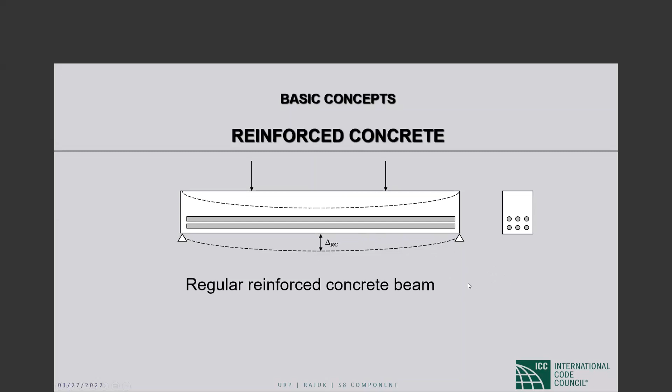That's a springboard for prestressed concrete. So what happens in prestressed concrete? Now we have an active steel that is not passive anymore. What we do is provide the steel in there. Please remember, this is not a regular steel rebar used in reinforced concrete.

It's a very high strength steel, and these are typically not a single rebar. There are multiple rebars, and most of the time there are strands made of several different components. We call that a tendon. So in any case, same beam, let's say simply supported, and we have the steel inside.

What we do now is stretch this steel. Sometimes we stretch it before the concrete is cast, which we call pretensioning—I have a slide later on that. And sometimes we call that post-tensioning, where the tendons are stretched after the concrete hardens.

So why is it beneficial? If you can imagine, if this stretched strand is let go and anchored against the concrete, immediately the tension converts to a compression, a pre-compression on the bottom of the beam. If that happens, then this beam suddenly cambers up—we call this a camber, which is really an upward deflection of the beam.

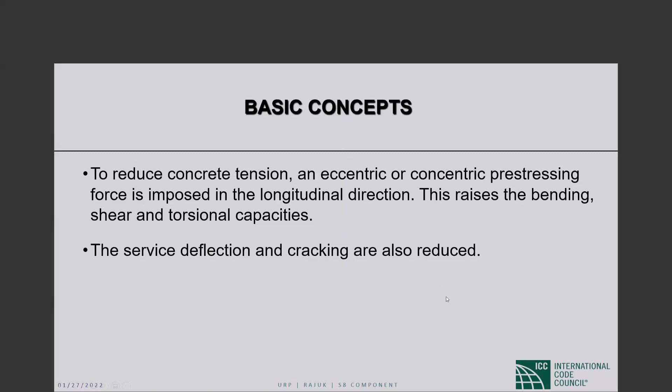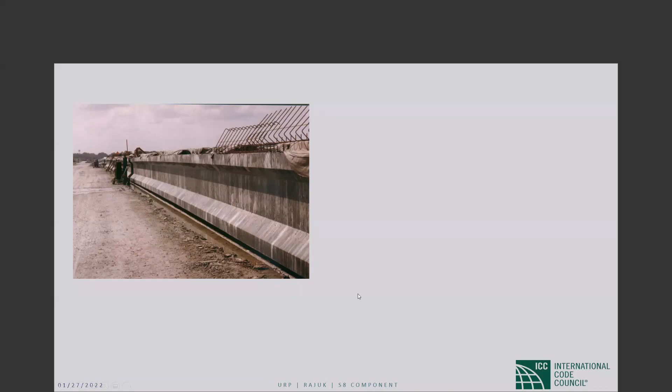What's the virtue of precasting? Well, there are many virtues. Precast concrete is supposed to be better quality. It's supposed to have more control. As you know, concrete has many, many ingredients. Modern concrete has even 10, 15 ingredients in there. So how to control that mix? That's the big thing. How to control the curing, how to control the storage. So that's really helpful in a controlled environment like a precasting yard.

So here is another beam, which you can see here. As opposed to the I-beam, this is what we call a ledge beam. Why is it called a ledge beam? Because you can see the ledges on two sides, right? So you can see the pre-stressing strands here very clearly. If you look closely, you'll see that these are not really one solid strand. It's made out of 7 wires. So typically, we call it 7-wire strand. There are many of them here in the bottom flange.

And this is used typically in a building where there are floor beams which come from the side and rest on this ledge beam here. Okay? Very simple construction. The floor beams are simply supported, while these can be simply supported or they can be continuous. So you see here, if I'm in a classroom, I would ask the students, what's going on through these pipes?

So these pipes are feeding steam onto the member. Typically once the steam is released, it's covered by fabric. So this whole concrete is steam cured.

What's the advantage of steam curing? We know the hydration of cement is very important in concrete. The more the cement hydrates, the better the strength. Typically moist curing is done about 28 days, but steam curing can cure the same amount of cement in about 24 or 48 hours. So this whole curing process will be done in 2 days.

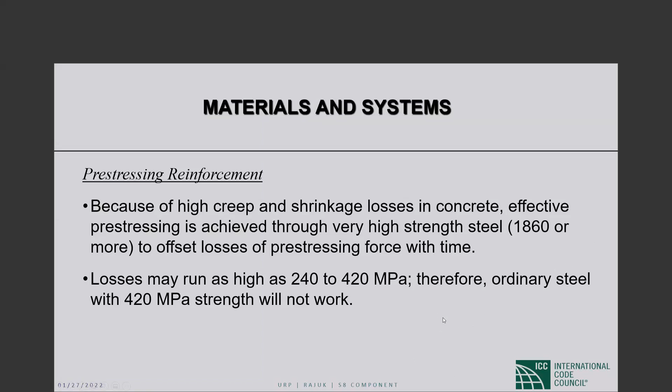So these are the different forms of pre-stressing reinforcement that are available. There are stress relieved wires, stress relieved strands, and high strength steel bars, Dywidag bars. Nowadays, the question is, do we have to use steel? No, not necessarily. As you know, composites are available now. There are reinforcing bars made of CFRP or GFRP, and there are also pre-stressing tendons available in composite.

So the advantage is that the composite will hopefully never corrode. They cannot corrode because they are non-steel. There are some thoughts that they may degenerate with time, the composite may degenerate, but that's a different issue. So the corrosion potential is wholly removed.

So one advantage of composite reinforcement is the life cycle cost. We talked about durability and sustainability of the structure in the previous slides, so we should not really look at the initial cost of the structure. If you think about the cost of steel rebar versus composite rebar, of course the steel will be much cheaper because it's widely used and widely produced. So with time, hopefully the composites will take hold and the price will go down.

Composites are quite a bit more expensive than steel right now. But if you look at the life cycle cost of the structure, it's a no-brainer, because in a structure in an aggressive environment, if you have to repeatedly intervene with rehabilitation, repair, inspections, or even replacement, that simply may not be cost effective in the long run. So you need to look at the cost benefit ratios, and from that angle, composites make sense.

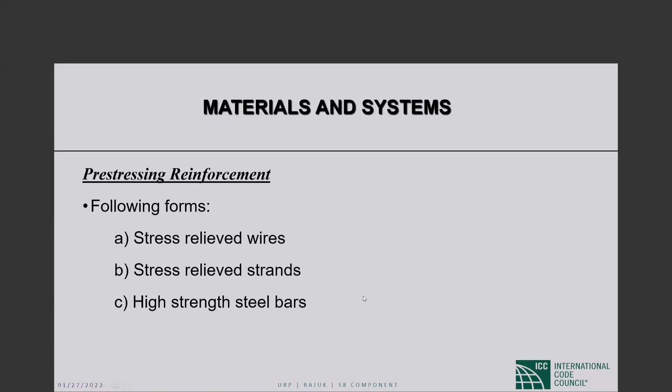So I talked about the two types of pre-stressing systems. One is pre-tensioning and one is post-tensioning. There are structures where they're hybrid - the structure can be partly pre-tensioned and partly post-tensioned. I will talk about that a little bit later on. Or the structure could be wholly pre-tensioned or wholly post-tensioned.

Sorry, somebody's calling on my Teams phone here in the office. I apologize for that.

So here are some points on pre-tensioning. In pre-tensioning, as I mentioned before, we have fixed anchorages - bulkheads on the sides. Before the concrete is cast, we place the tendons there, then we stretch it, and then we anchor it against the bulkhead. So you can imagine that the tendon is still in tension.

It is normally done at a precast yard, which is really cost effective in terms of the management of the casting and also the storage and transportation. Or for large jobs, it can be done on the site. It's not unusual in the USA for large bridge projects to have a temporary precast yard set up at the bridge site, which really cuts down on the amount of transportation that is done.

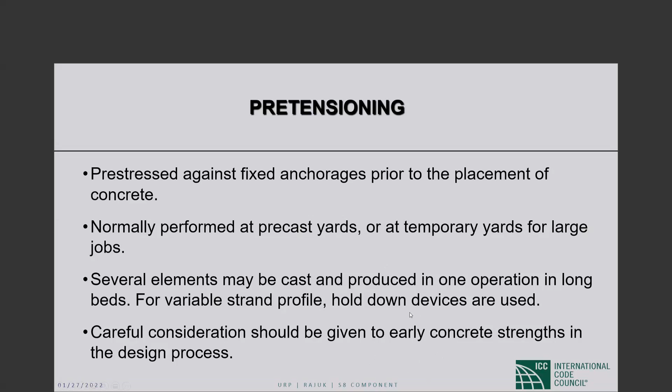And there's a calibration chart - if this is elongating by 500 millimeters or whatever, then what's the corresponding force in kilonewtons? That's known from the manufacturer. So that's what we do, it's a very simple process.

I have some photographs, I don't have them here in this lecture. I probably will include them in my bridge lectures later on, where you can see how people are measuring this. Now, this is very, very risky practice - I should not laugh, because people have been known to lose their fingers because someone standing operating this jack, and suddenly this strand breaks, and strands can be defective.

There may be some defect in the manufacturer, so suddenly this flies at high speed, and there are injuries to people standing here. That's a very difficult, very risky practice, staying nearby this. I'm sure the precasters take proper precautions, and there are liability issues that are addressed.

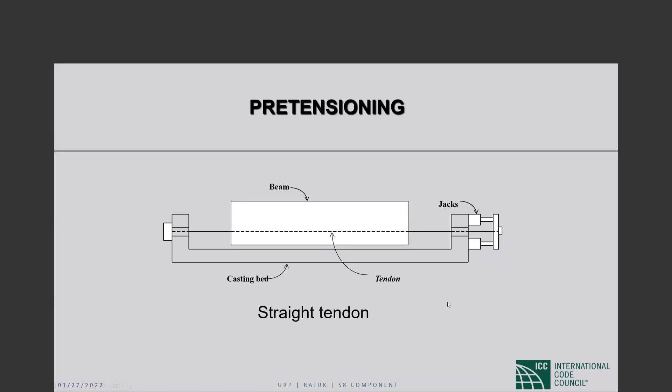Long line casting follows the same logic: beam 1, beam 2, beam 3, and so on, even beam 10 for a big yard - there can be 10 beams. They are laid longitudinally, a very efficient system. The same tendon goes through all of them. There's a little bit of separation here for cutting the tendons, but it goes in here.

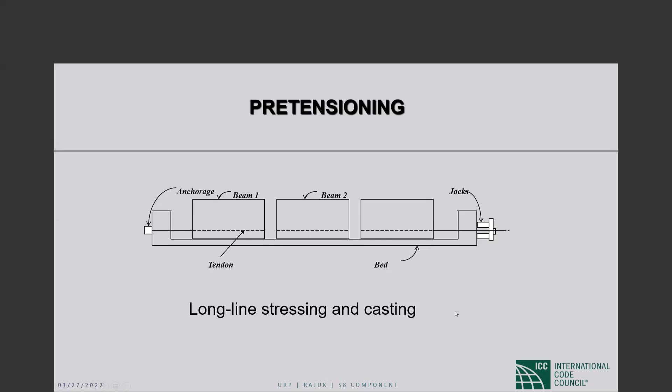As opposed to pretensioning, post-tensioning is done on hardened concrete. So instead of having the strand bonded to the concrete, what we do is place things differently. Let me adjust this so it doesn't obscure the view.

Strands are placed in ducts. What we do is place empty ducts, like a conduit. It can be made of steel or plastic. These are placed in the formwork ahead of time, before the concrete is poured.

After that, we apply the concrete, casting it around the duct. You can imagine there's an empty duct, a void, in the concrete, and we can even vary the profile of the duct to conform to the moment diagram. Once we apply the concrete, it hardens.

Then we feed the strands through the duct, from one end to the other. We anchor it on one side and apply the pre-stressing from the other side. There are grouting ports into the ducts, and we typically inject grout from one side of the duct. The grout comes out the other side, so we know the conduits are fully grouted, giving us the bonding we desire.

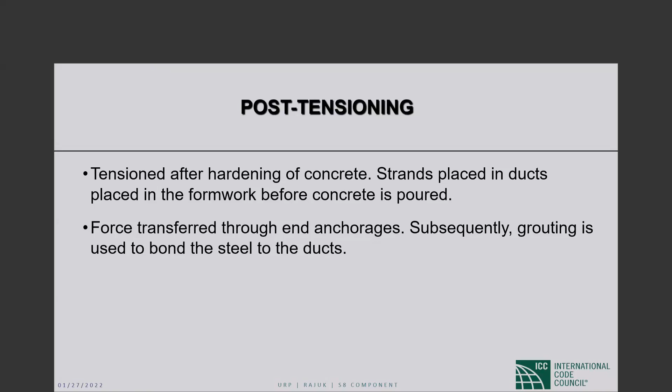Sometimes there are intermediate diaphragms for the beam. If there are voids in the beam like this, the tendon can still be fed through the different parts of the beam, and we can stretch the jack, the tendon, the same way. We'll have the desired post-tensioning in the beam, which stabilizes it. If you need to reduce the dead load of the structure, this is a convenient way of doing that.

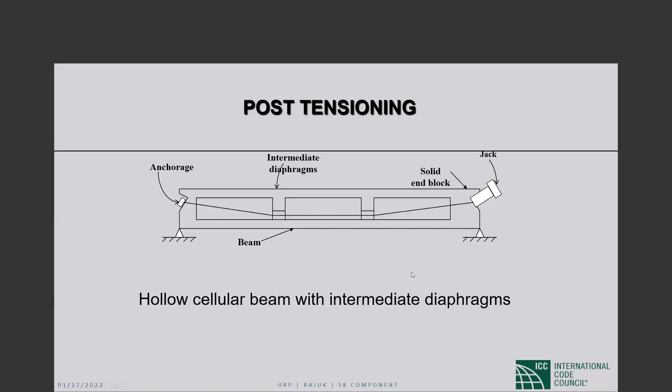Here's a case of a continuous beam, one reason why we do post-tensioning. This is a cast-in-place beam, two spans, three supports. As we can imagine, this is a continuous beam. Depending on the end condition, there could be end moment. For this hinge support, there'll be no end moment, but we can guarantee there'll be negative moment at this intermediate support. This can be a bridge member or a building member with continuous spans.

It can be multiple spans, more than two. So there's no moment here at the hinge condition, but there is negative moment right there. And as we know, in the midspan area, there will be positive moment on this span and positive moment on this span. The trick here is the designer has to address those moment curvatures, or the moment profile, because we try to use the post-tensioning to effectively give us resistance against those moments.

So what we do is use a variable profile. You can see here that the steel is bent down here, below the centroid of the beam. This gives us a negative moment at this point from the pre-stressing, which will react against the positive moment from the loads, dead load and live load on the slab.

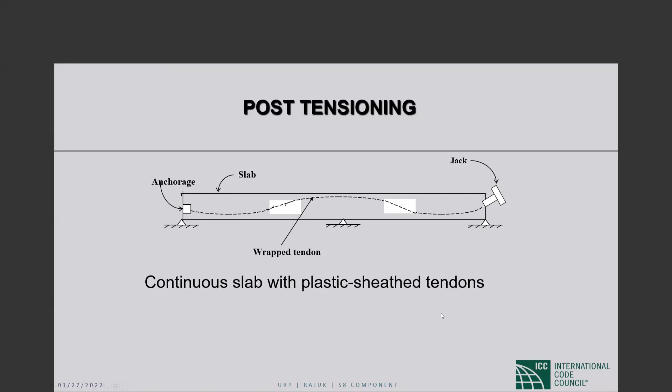So with that introduction on prestress construction, let's go into the design equations. Some of these are simple and some a little bit complicated. If I've taken them from ACI 318-08, the SI version, the number will be shown in parenthesis next to the equations. If you have a copy of the 318-08, you can go back and check them out.

As I mentioned in the previous slides, the stress in a prestressed member is very important, especially on the tension side. Not only that, the compression side is also important. Although concrete has reasonably high compressive strength, you don't want that to be exceeded. So these are the basic equations, which are not from the ACI code, but from mechanics or statics, maybe mechanics of materials.

Let me explain these three terms. This is the axial stress term, P over A, the prestressing force divided by the area of concrete. I have used negative sign as compression—some people may use positive for compression, but I typically use negative. So we understand that's uniform stress on the cross section.

Next would be the moment from the prestressing. The prestressing force times the eccentricity gives us the moment. Then the centroidal distance to that point, divided by I, gives you the bending stress. In mechanics of materials, we call that MC over I, a very well-known equation.

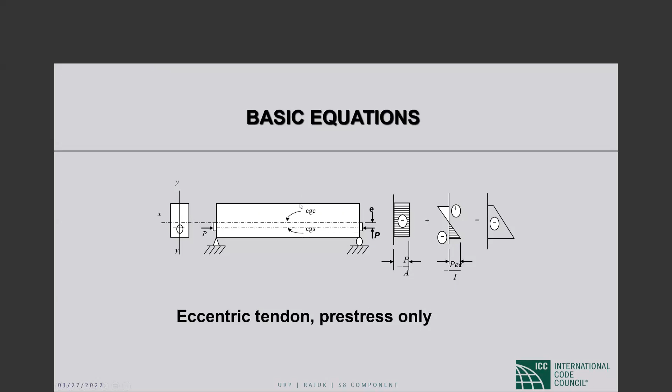So this is the condition which happens after prestressing transfer to the concrete beam. Now let's think about the life of the structure. I always believe in looking at the sequence of loading on the structure. It's very important. Sometimes as a designer, we forget that the loads are not applied at the same time. There can be lag in the loads applied.

So let's think of the life of this pre-stressed beam. It has been cast, and it may be lying somewhere in a precast yard on the side. It's not unusual to sometimes have them stacked up one on top of the other, because in the yard they're trying to save space. If it's at the site, it's probably being placed in service. So from the precast yard, we'll be moving them to the job site, at the building or a bridge, or at the temporary site, we'll be putting them up.

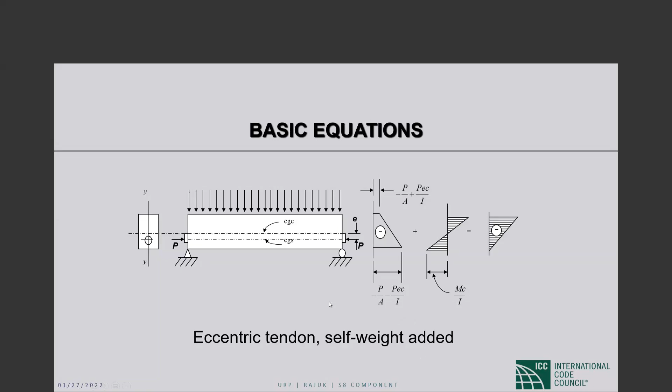With that, the next loading stage would be the self-weight of any additional attachments like slabs or decks or floor finish or something like that. And then we're going to go into the live load. All these sequences may not happen immediately after the previous stage. It will not happen the next day. It may take sometimes a few months for going from here to the next stage.

ACI addresses that, as you know, through providing covers, minimum covers for concrete, and then also providing clear spacing between rebars or layers of rebars. Now, we should not use the same values for pre-stressing. They're quite different, and I like to point out that in ACI there are separate values for pre-stressed concrete, which is different, most likely lower than reinforced concrete. I showed you that same photograph before.

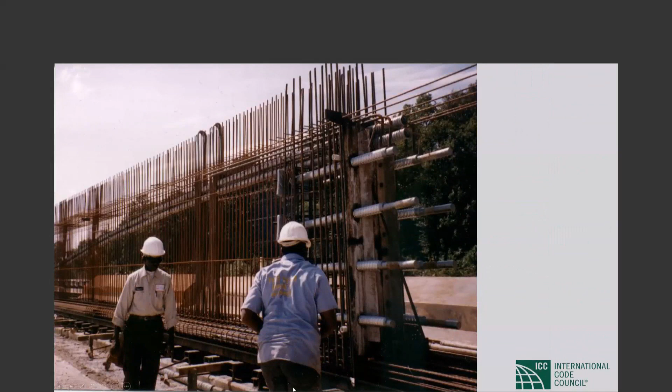Here is the post-tensioning beam. Interesting, post-tension beam. This is being cast here, and you can see clearly that the ducts are here. These are metal ducts. There are ducts in the bottom here, ducts here, ducts there, and ducts there. You can easily see the profile of the tendon going up from here, which was in the bottom, which I showed you in the drawing before, and it's following the moment curvature of the beam.

So over here, I'm imagining this will be a support where there will be negative moment. So this is trying to address that by varying the profile of the tendon and providing a negative eccentricity from the centroid of the beam. And you can easily see the shear reinforcement, which goes all the way up there. Most of the time, they are sticking up from the beam because we need the dowel action that would be needed to make the deck or the slab composite with the beam, if it's needed that way.

Also, I'd like to point out, these are what you may know as hold-downs, these are called lifting devices. These are made of cables which are embedded in the concrete. And if we need to lift that, we'll be lifting it from here upward. That's a tricky issue, and again, the designer should be aware of where should we lift it. It's a very, very critical point.

If it's a simply supported beam, you want to lift it a certain way, and that may cause unanticipated stresses, although it may be short or transient, because you're lifting it and placing it on the side or on a truck or barge or whatever. But if I'm not careful about anticipating those stresses and providing mild reinforcement at least to control cracking, that member may be in trouble. So that's good to remember.

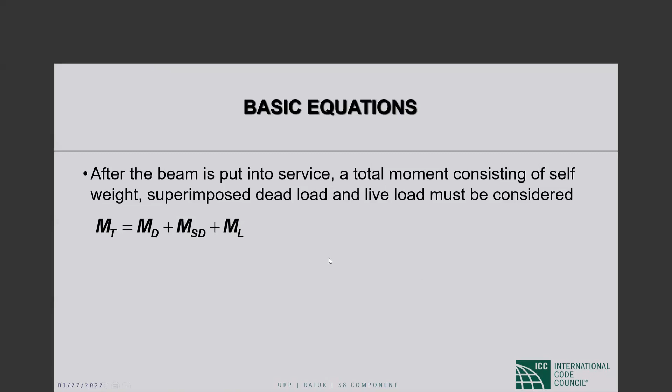So I like to point out here that the difference from the previous Pi I mentioned, which is the initial pre-stress applied at the beginning of the structure's life, has now been reduced. Typically in pre-stress design we call it effective pre-stress—it has been reduced by losses. Losses are unavoidable in pre-stressing steel, it will happen, and I'll cover that in some of the slides later on in this lecture. How much to reduce? Sometimes we use detailed calculations, and sometimes we use what we call lump sum losses for pre-stress. So this has summarized everything.

This is the top stress in the beam, and this is the bottom stress in the beam. I have placed this in a convenient form—instead of using that MC/I form, I have used the R squared form. R stands for radius of gyration, which is a convenient expression that summarizes the I and A values in the beam. So this has kind of simplified the equation.

And we can use these equations as well if you want to design for stresses in pre-stressed beams. This is the total moment. Now, what I have also done is replace I over C with S, which is the section modulus—this is the top section modulus, and that's the bottom section modulus. So you can appreciate, suddenly this equation looks a little bit simpler. Instead of using the longhand I and A values, I'm using R, radius of gyration, and section modulus.

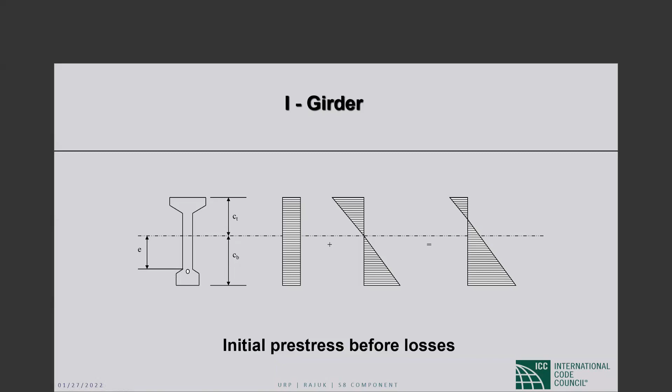Addition of self-weight. Now we understand that we are progressing now to the different loading stages. This was the previous with only pre-stressing applied. Now it's self-weight. And suddenly we have this situation where we have unequal stresses, quite a bit of non-uniformity on the cross-section.

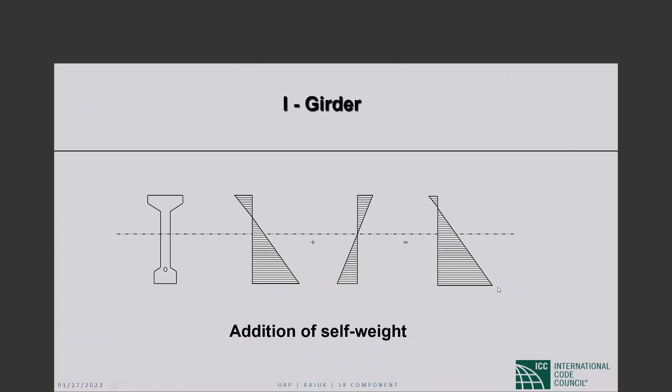Now this is service load at effective pre-stress. So the pre-stress has been reduced by the losses. And then we apply the other loads on the structure. Suddenly we have a little bit of improvement in the condition. So this stress has been reduced a little bit, and this stress has also changed. So that's why ACI applies stress limits. There are two kinds of stress limit. One is for the initial condition, and one is for the service condition. They are different, and ACI indirectly recognizes these kind of situations in those stress limits.

So now we can fall back onto ACI code 18.4. If you have a copy of that, you can look into the ACI code, or you can look online. I found ACI 318-08 metric online, okay, and it's available. Initially, I was trying to buy it from ACI, and it was quite a bit expensive, so I got it kind of free. Google is very much our friend, right? So you can get all kinds of stuff on Google.

So here is the stress f'ci, as I mentioned before, compressive strength at initial pre-stress. Now we understand. Please be familiar with this nomenclature, this subscript. i means initial, and f'c is the compressive strength at service. It makes sense, right?

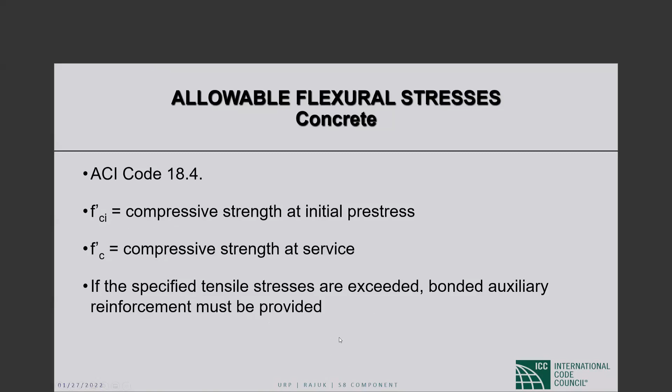So these are the stress limits. By now I'm hopeful you understand the difference between transfer and service load. To repeat: transfer means initially when the pre-stress is transferred, and service means when all loads are applied and the member is in service. ACI does not recognize intermediate load cases, as I mentioned before.

In compression, the limit is 0.6 F prime CI anywhere. So if you have a compressive stress, this is the limit. F prime CI is the initial concrete strength. We collect cylinders during casting, doesn't matter what stage. Then we test some of the cylinders initially, depending on when the pre-stress is released. If it's steam curing, we've been doing it at 2 or 3 days. Then we test the rest of the cylinders at service, typically 28 days.

At the end of simply supported members, the limit is 0.7 F prime CI. These are in metric, in megapascals. Using the US system, that would be in KSI with different factors applied. For tension stresses, the limit is 0.5 square root of F prime CI at simply supported members, or 0.25 square root of F prime CI at other locations. I'm interpreting this as meaning this could be for continuous members where tension can appear at other locations besides the end of simply supported beams.

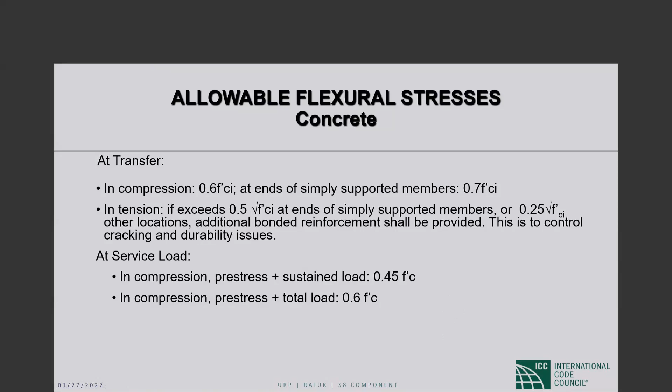So what I mentioned to you before was the stress in the concrete. ACI also imposes stress limits on the steel itself because you don't want the steel to be overstretched. Am I right? There are limits on the steel stresses.

So here are the limits, expressed in terms of these two factors you may be aware of. The steel has a yield strength. In reinforced concrete, we call it Fy. Or if I'm using bonded steel, we call it the same thing, Fy, but ACI adopts this subscript P for pre-stressing. So yield point is a critical factor in reinforced concrete design.

Although there is strain hardening in the steel, we typically ignore that. The pre-stressing steel is much stronger, so it will be a little more brittle, so the strain hardening and the yield point may not be that well defined. But in any case, we know that from the manufacturer. And FPU is the ultimate strength of the steel. So knowing these values, these are the limits.

This is from ACI code, section 18.5.1. So due to pre-stressing steel jacking force, which is at the very beginning when you are jacking, this is the limit, 0.94 FPY, but not greater than the lesser of 0.8 Fpu, and so on, for immediately after pre-stress transfer.

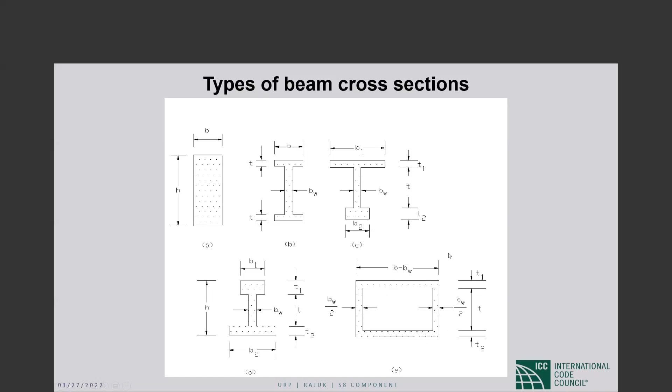Now, when you start designing pre-stressed concrete, sometimes you grope in the dark. What shape should I use? Should I use an I-beam, a T-beam, double T-beam, one-way solid slab, hollow core slab, or two-way solid flat plate? I'm sure you know the difference.

One-way solid slab versus two-way slab, I think Dr. Ghosh may have already covered that. Hollow core slabs are precast slabs where the core is hollowed out. Very common in the USA for office and hotel buildings where you try to reduce self weight. One issue with concrete structures is dead load, self weight is quite high compared to steel or timber, so reducing self weight is economical for us.

Flat plate means there are no beams applied, though there may be column capitals or stuff like that, and there's also flat slab.

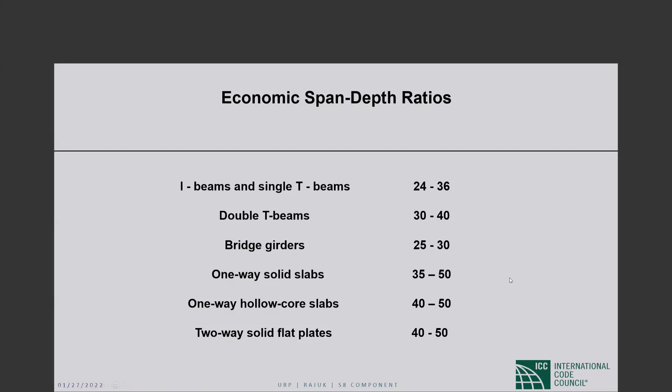So what we do is select the shape based on the span depth ratio, which is done for buildings as well as bridges. In the bridge section, I will cover how to do preliminary design, how to select the shape for a bridge girder, and then how to economize the design.

So we select a trial section. You have to start somewhere, right? You cannot just start blankly. A trial section means what's the shape, what's the size of that member. We select an F prime C based on practice. Then we limit the top section modulus and the bottom section modulus.

Then we have to modify the section. Typically for any design, it's an iterative process. So we go through this iteration, maybe one, two, or three times, which can be quickly done through spreadsheets or software. It's an open-ended problem, and you may end up with two or three different designs. Then you select one based on your preferences and also the availability of material and other factors that may affect the construction.

Very important, I mentioned steel protection before. Here are the provisions from ACI code 318-08, section 7.7. Again, I invite you to visit that section if you're trying to design pre-stressed members. Please don't use regular reinforced concrete cover values, which I think are actually in the previous section. The covers given there are for regular reinforced concrete.

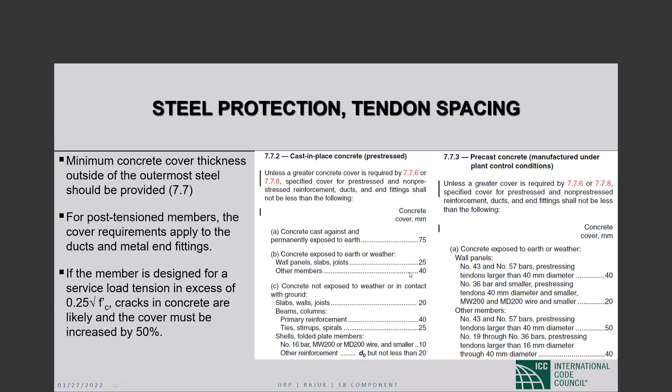So the cover is one part of the durability aspect of the concrete, but the minimum spacing is also important. The clear distance between bars and strands should be the diameter of the bar or 25 millimeters, whichever is larger. That's important because of the prospect of congestion of rebars and difficulty in placing concrete, which can cause honeycombing and strength and durability issues.

So at the end of pretension members, the spacing requirements are increased by ACI. These are all ACI provisions—I think this is from section 7.6. Please pay attention to that, and if you have the ACI code, you can look at those pages.

And if you are using bundling bars, bundling of tendons, up to 4 tendons or bars is permitted, not more than that. That's probably more prevalent in post-tensioning than pre-tensioning.

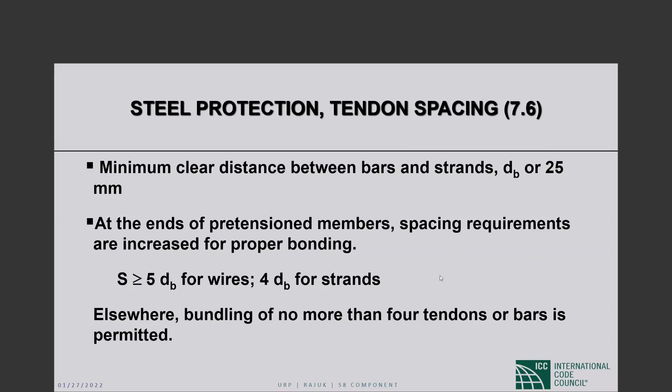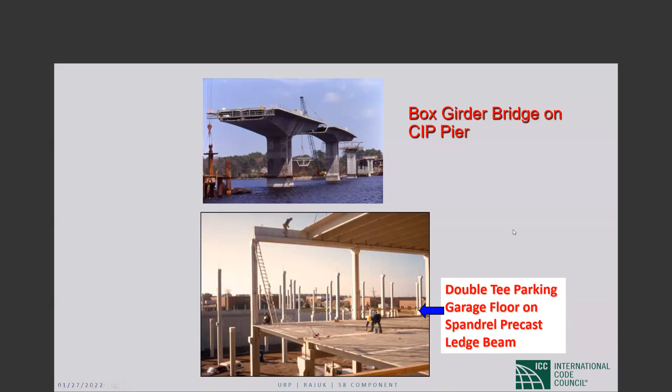Now let's change gear here. With the limited time we have, look at the loss of pre-stress. As I mentioned before, losses are pervasive. You cannot avoid loss. So if you can't avoid something, you have to live with it. Pre-stressing will lose stress over time.

Approximately 5 years. Studies have been done, and ACI has curves like that, which show that after 5 years, the losses kind of level out. And if you provide for that in the effective pre-stressing, you should be in good shape.

Now, I like to point out that although ACI and AASHTO have detailed calculations for losses, the different components of the loss, you can spend all day figuring out those losses, but they are very difficult to understand because there are many, many interrelated issues. For example, there is humidity in the air, there's temperature effects and interaction between them and the camber. It all makes it very difficult.

And camber is very hard to predict. We can also try to predict camber, but it's very difficult at the end knowing what the real camber is. I'll talk about camber in a future slide here.

So most of the time, we end up using reasonable lump sum loss estimation. So it's not accurate, but they are conservative. Of course, if you have an efficient computer program, you can do the detailed loss calculation pretty easily, but we can get away with the lump sum loss also with reasonable accuracy.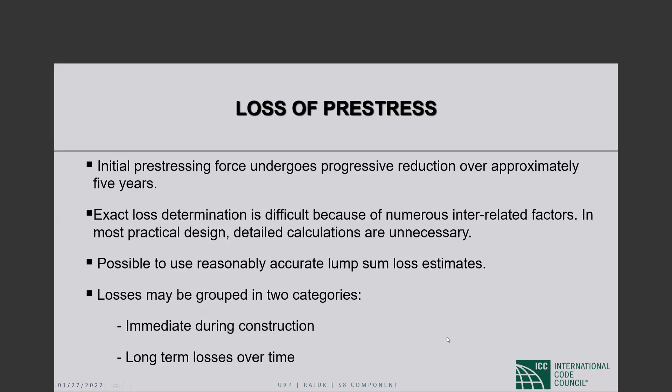ACI code does not have lump sum loss estimation. There's nothing there. There are other publications which address that. AASHTO has a table for lump sum loss. The ACI code, as you know, is for building design, and AASHTO specifications is for bridge design. So we shouldn't intermix between them. And the Post-Tensioning Institute in the USA also has published such tables. So I'm suggesting that it's really up to you how you want to handle the pre-stress loss calculations, but these are guidelines that we can fall back upon.

So let's talk about the individual losses. First one is very simple, elastic shortening loss. So what's happening here is that this is instantaneous, immediate loss. We have the member, the pre-stressing is applied, initial pre-stress, note, it's immediate. Then the member shortens. Of course, the concrete will shorten, right? It will be compressed because of the pre-stress applied.

So that gives us the basis to figure out how much is the loss. That means how much is that stress, that the strand is giving in with the deformation, and how much loss is being applied.

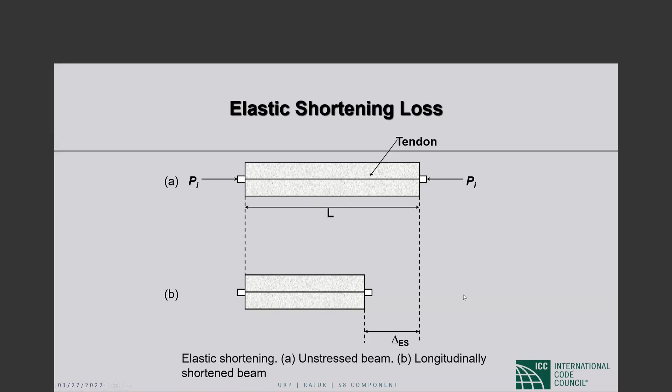Relaxation loss, on the other hand, you can easily imagine this. If I hang a stretch of the strand with certain force, after some time, it will give. It's a property of the steel. With time, it will give. It will relax, and that's what is called relaxation loss. This is the ACI equation for relaxation loss, FPT, the factors involved. I think I showed this in an example that we'll talk about later on. So I'm trying to just give you a flavor of the different losses and what they mean in summary form.

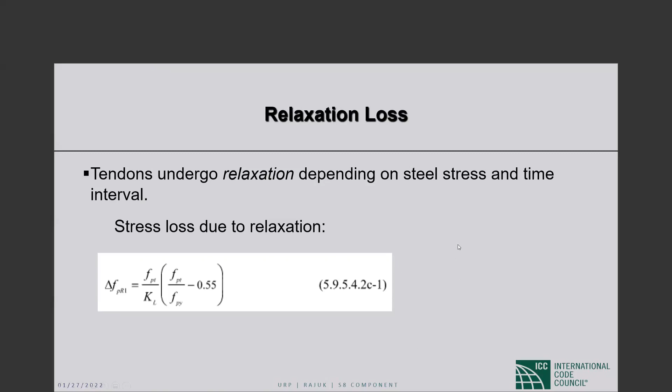Creep loss, on the other hand, is due to concrete properties. Concrete has two kinds of properties that affect the loss: one is shrinkage and one is creep. As you know, creep is the effect on concrete of sustained loads. So if there are loads on the concrete for a long time, concrete will give. So that will cause loss in the steel as well.

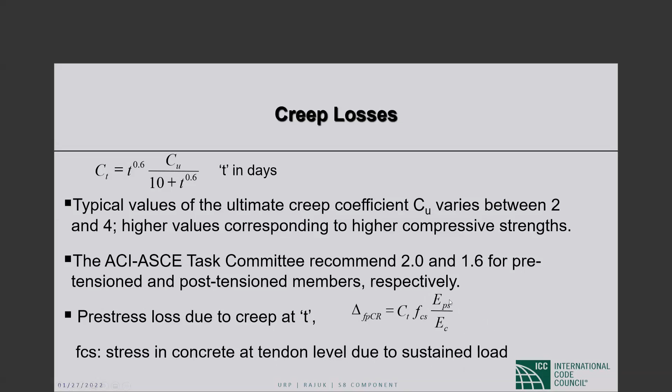Shrinkage loss: it has been shown that approximately 80% of shrinkage occurs in the first year. Shrinkage means that with time, it's a property of concrete. We cannot avoid it. It will shrink. Some concrete will shrink more, some will shrink less. It depends on water cement ratio and other factors, humidity and temperature, environmental conditions.

Now, there's nothing wrong with shrinkage, but if you restrain that member, the concrete is not allowed to shrink, and as a result you may end up with shrinkage cracks. In the USA, we see this all the time, even in new bridge decks, they have these transverse cracks. So cracking is nothing wrong with that as long as we manage it, and that's why we provide shrinkage and temperature steel in slabs and decks.

So that will cause loss. How much loss? This is again called the concrete shrinkage strain. It's sort of given to us, the values are here. These are the values. Typically it varies between 500 to 1000 times 10 to the power minus 6. This is strain, so there's no unit attached to it.

Again, that same task committee recommends 780 times 10 to the power minus 6, which will be about the midpoint between these two. So I would suggest don't spend too much time on that, just use the approximate value. And PCI stipulates a value of 820 times 10 to the power minus 6. So it's really up to the interpretation which value you want to use.

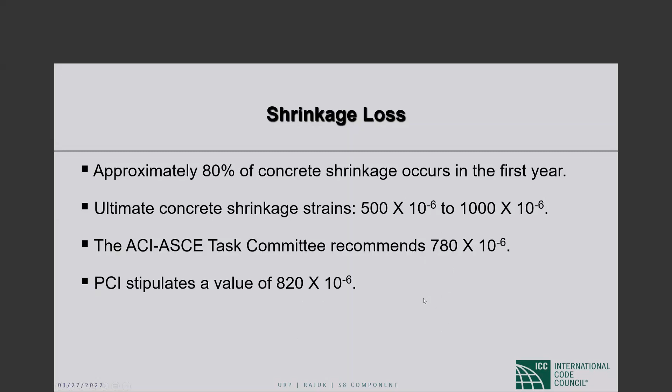So these are the shrinkage strain ratios at time t, relative to the ultimate shrinkage strain. So what you do is figure out what ultimate strain to use based on the previous slide. Then T is in days. So this simple equation, if you're using moist curing after 7 days, this is the equation to use. This gives you the actual shrinkage strain, time-dependent, at that time. This is for steam curing; if you're using steam curing, this is the equation to use.

And then after you figure out that strain, it's a very simple matter of using Hooke's law, multiplying it by E of the steel, to get the shrinkage loss. So there are ways around the complicated formulas. There are simple equations that can be used.

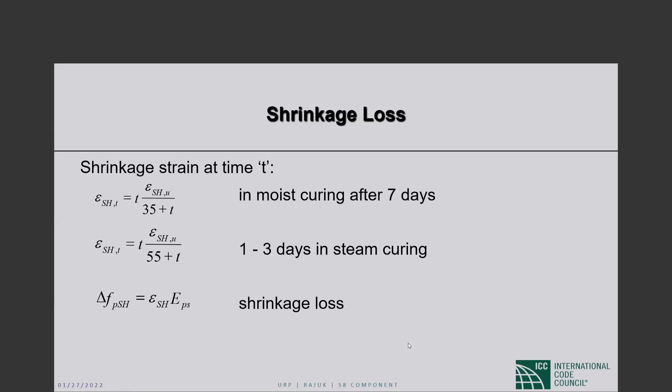Now friction loss is common for post-tensioning, not for pre-tensioning. Let me explain. What happens in friction loss is that you have this duct in post-tension members. After you place the concrete, you stretch the steel and the steel is going to slide against the duct. You think it's at the middle point, but it may not be, especially for curved ducts. That can be an issue. So friction loss will happen because of the sliding effect, and that's taken care of by the friction loss calculation.

There are two kinds of friction loss: wobble friction due to unintentional misalignment—meaning you didn't intend that to happen—and curvature friction due to intentional curvature if you have curved ducts.

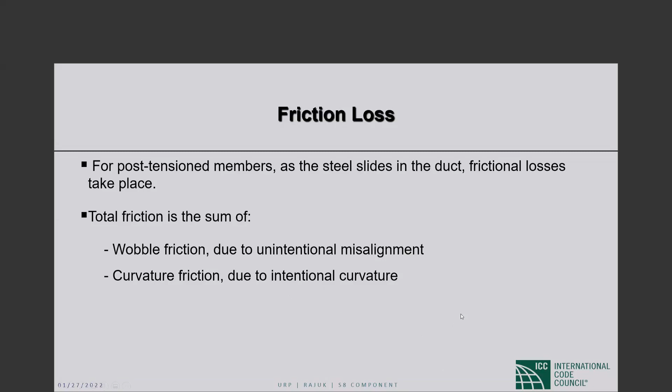This is, in my judgment, the most complicated one to figure out. If it's pre-tensioning, you don't have to worry about it. This doesn't happen, so please don't find friction loss in pre-tension members. But for post-tensioning members, you have to figure it out and factor it into the total loss.

The next one is called anchorage slip loss. Think about that: you are stretching these post-tensioning members, anchoring on one side and jacking from the other side. Then you are anchoring that on the other side as well. So the anchors are not perfect. There'll be some loss, some slippage within the anchorage. So what we do is try to estimate that, and that will create loss in the member. We factor that out in this loss.

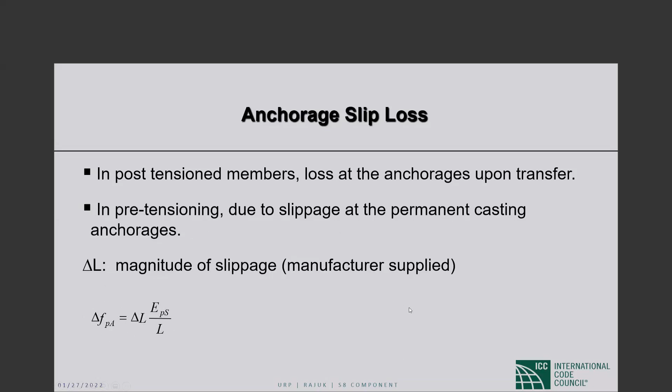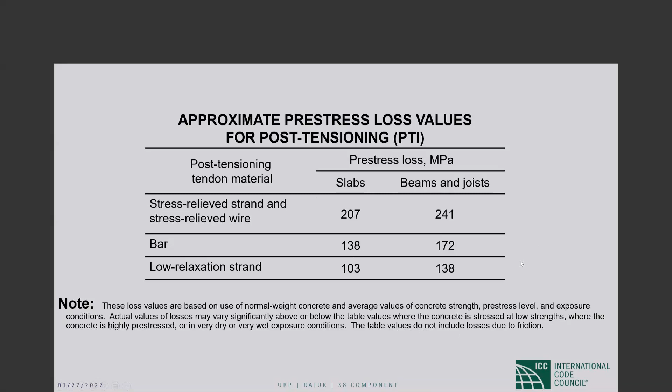Now we jump into flexural strength, very important, right? We do all the loss calculations, we do the stress checking, the member is fine, but how do we know the member is safe? So typically for beams, we check the flexural capacity and the shear capacity. You may also have to do the torsion capacity. For compression members, the axial force capacity or beam column capacity and so on.

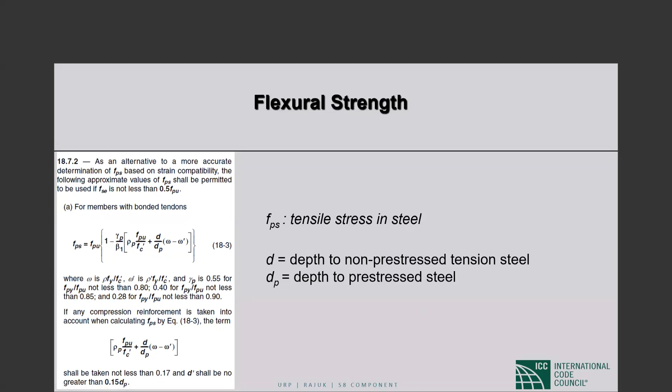How to find those values? These are additional equations. Unbonded tendons, depending on the span to depth ratio, 18.4 equation. There's a limit on that. And for more than 35 span to depth ratio, use this equation. So there's a lot to cover in this lecture. I'm just giving you the overall ACI provisions, and please feel free to use them as you see fit.

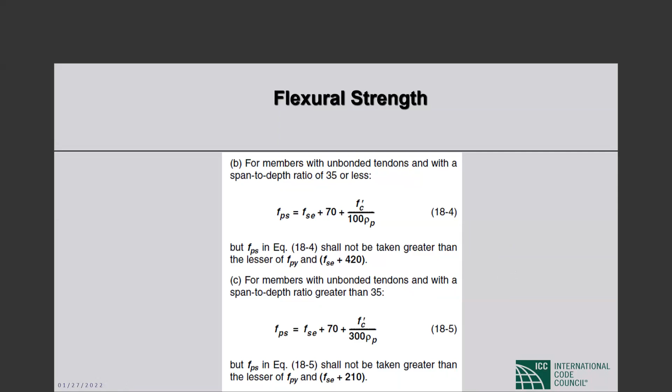So the essence of the flexural design of pre-stressed concrete is that, as I mentioned before, you figure out the member proportion. That means the size, the shape, the width, and the depth based on the stress limits, right? Allowable stress method. So compression stress, I showed you the limits before. Tensile stress, I showed you the limits. And then you select the cross section, the pre-stress force and eccentricity to make sure that you're within those limits. We cannot violate those limits. That's very important for that purpose.

So one thing I like to point out, when you do allowable stress design, this is not LRFD. So please don't use load factors. No load factors, no phi factors in this calculation. This is service design. Just use the actual loads, similar to what we do when we find deflections for reinforced concrete members. We do not apply the load factors. We check the deflection only at full service load. That means we use P effective in that calculation.

And partially pre-stressed beam means that the beam is not 100% in compression. So as I mentioned, I showed you in the previous slide, the bottom of the beam may be somewhat in tension. For those, you need to control cracks, which is very important. Again, if I impose those ACI tensile stress limits, I should be in good shape.

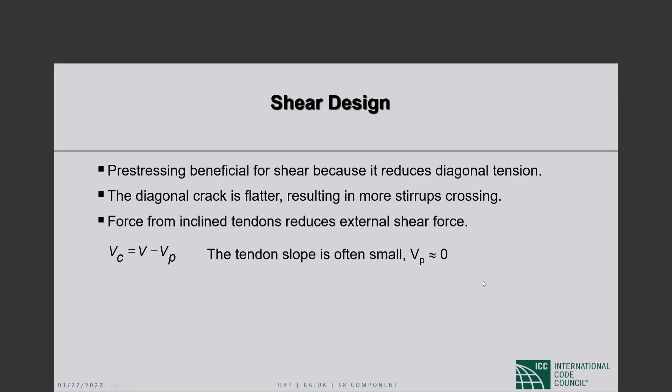So if I have inclined tendon, this is interesting. As you know, VC is the concrete shear capacity. V is the total shear. And this is the component from the tendon slope, VP. So if I have a 10-degree slope, this will be reducing the shear. It's kind of small. If I assume VP to be 0, I'll be conservative. If you have a really steep profile, you can use that to your advantage in reducing the number of stirrups or increasing the spacing that you need.

So I'd like to point out this cracking potential in prestressed concrete beams. Now this is a continuous beam. So continuous supports, this is important to understand the shear provisions. At the midspan there will be positive moment, typical for continuous beams. There will be cracking with a pattern like this. Near the maximum moment the cracks are kind of vertical, and then gradually become inclined, diagonal cracking as you go away from the maximum moment. This is called flexure shear cracking.

The same thing happens on the other side: negative moment, cracking starts on the top and gradually progresses inward. Away from that, there'll be web shear, meaning you're away from the high moment region, which may have negative moment or no moment for simple support.

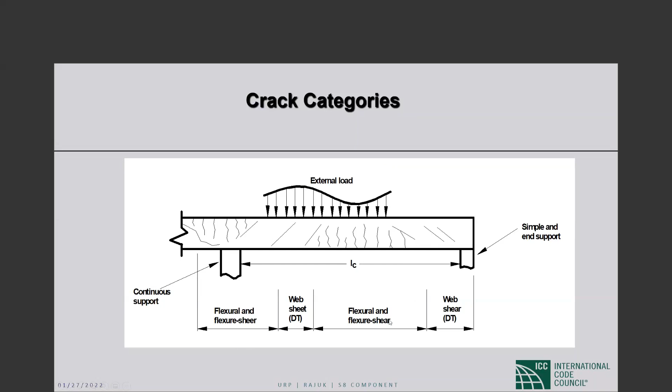Then the web shear will take over. So ACI gives us two equations, one for flexure shear cracking and one for web shear cracking. In ACI nomenclature, V sub D stands for self-weight shear, which is external shear. V sub P stands for pre-stressing shear, and VCI is the total shear producing flexure shear failure.

Here is the upper limit. Typically I use D sub P, the effective depth to the pre-stressing steel. If I don't know much, I just use 0.8H, which is the upper bound for this calculation. FD is the flexure stress at the bottom face from self-weight only. FCE is the compressive stress at the bottom face, including axial and bending effects of the eccentric prestress force — that's all inclusive at the bottom face.

These are the equations straight from the ACI code. Critical section, as we know, is d/2 from the face of support — that's typical for shear design. ACI allows us to come out a distance d/2 and design for the shear at that point, which should be less than at the support section.

Here is the VCI equation, the flexure shear equation for shear capacity of concrete. The lambda factor is the effect of lightweight concrete on the strength of concrete, so ACI gives us values if I use lightweight concrete. Then F prime C, BW is the width of the web, and so on, and the moments are factored in here.

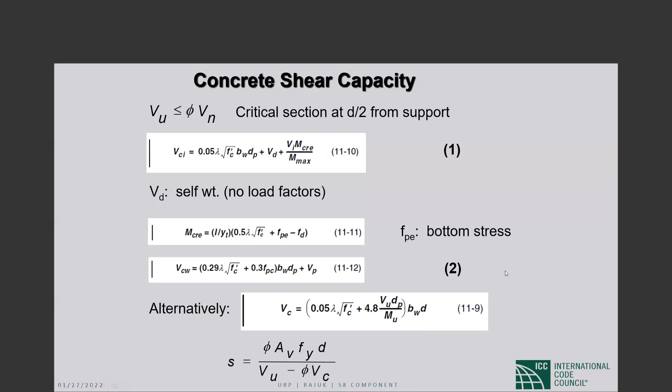Spacing limit for shear reinforcement is different again for prestressed concrete. The maximum spacing should not exceed d/2 — that's typical for non-prestressed — but for prestressed it changes to 0.75h, where h is the total height of the prestressed member in millimeters, or 600 millimeters. Very simple to understand and apply.

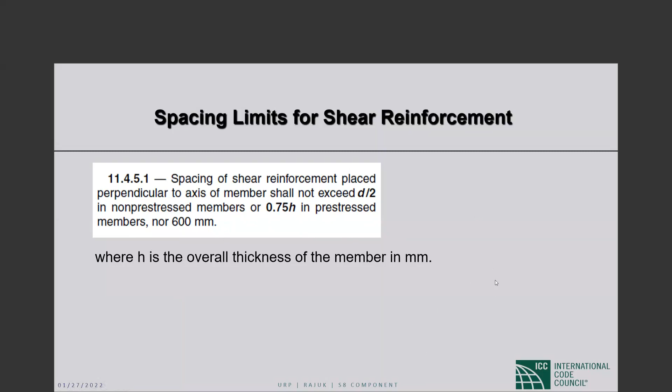That's very critical. If I use AASHTO provisions for bridges, we use 100% composite action, and that must be ensured — although in practice, I've seen that no bridge is 100% composite.

I showed you that diagram before — this is another view, closer up. You can see the shear steel very closely spaced at the support, and we increase that over there because the shear is maximum near the support of that beam.

Even the ledge beams can have stirrups, and typically the ledge reinforcement will stick out from the main beam on the ledge, providing resistance to any shearing activity punching through to the ledge that I showed you before.

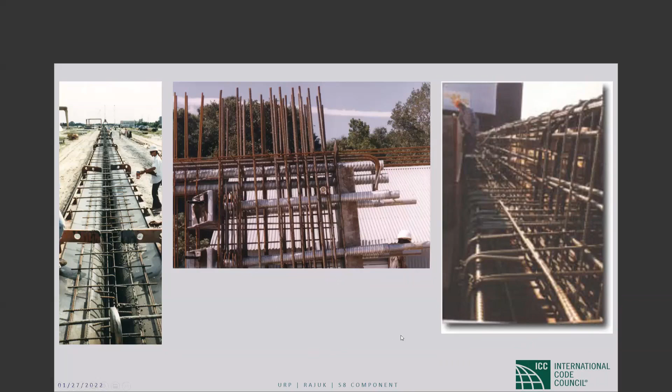We're not done with shear reinforcement yet. We need to look at minimum shear reinforcement. This is very similar to reinforced concrete, but the values are different, though the equations look the same. This applies when VU exceeds half of the shear strength, φVc, which is typical for reinforced concrete as well. So this is the AV minimum for prestressed concrete, a simple equation, but not less than this value here.

I'm just going to breeze through here because you can always fall back upon these numbers. I've shown the example where these are applied.

This is ACI chapter 11, which deals with both shear and torsion. More minimum shear reinforcement provisions: shear reinforcement is required, and torsion is neglected. If torsion is not neglected, then this is the equation to use. So you need to make a judgment call on whether to neglect torsion or consider it, then use the proper equation. All these terms should be well known by now, what they mean.

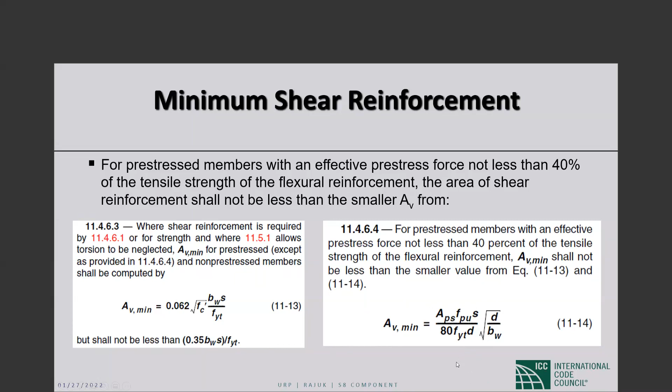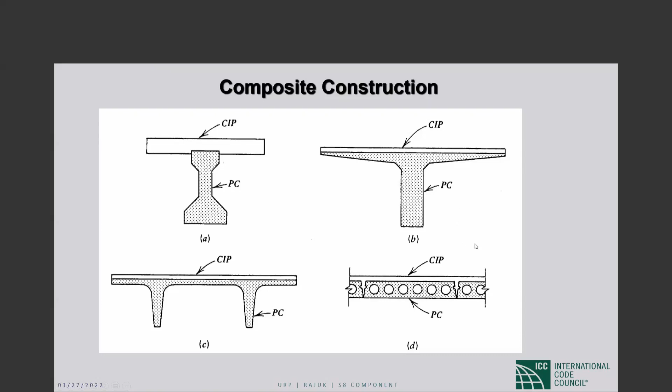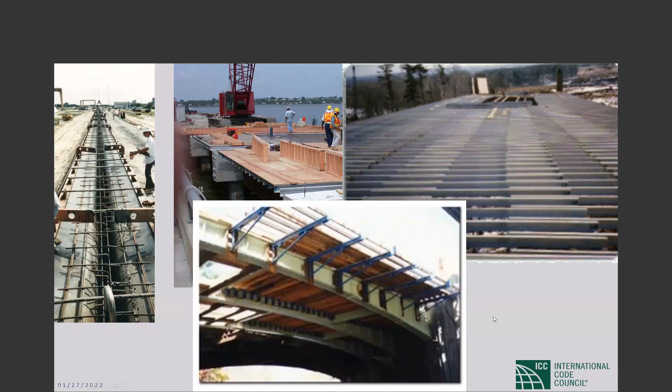So I talked about the stages of loading before. Here is another view of a typical bridge that we use in the USA. This is precast I-girders, with the dowel bars sticking out. You can see the deck, the cast-in-place deck. This is precast, that's cast in place. And we are using this innovative system.

It's called precast panels. This is prestressed, precast, simple slabs. We place them on top of the I-girder, then with the dowels sticking out, we cast the concrete. No need for formwork. Very useful for over traffic or over riverways or channels, with no intervention at all and very fast construction. By allowing precasting to take over, we can typically optimize the construction. This is very popular; actually in Texas, a lot of new bridges are like this. Typically, the precast panel is about 100 millimeters thick, and the cast-in-place on top is about another 100 millimeters, and they bond really well and serve the purpose.

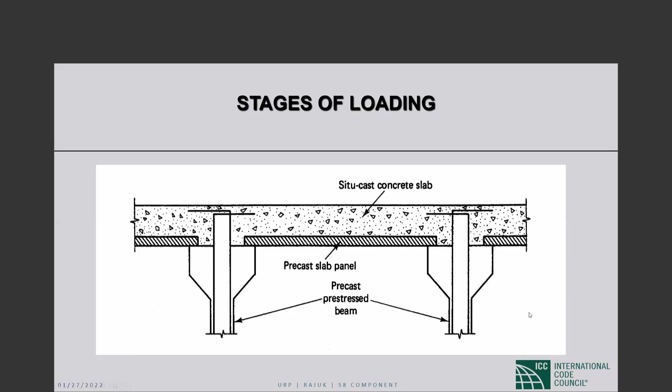Okay, last thing in the lecture is deflection. I'm trying to go a little quick here because I have two or three examples, and I don't think I'll be able to cover all of them, but I'll try my best. Because prestressed concrete beams are more slender, of course they'll be slender since we're using prestressing, that's the whole purpose, to economize the design, you will expect more deflection. Now, is deflection good or bad? That depends. Sometimes in a prestressed concrete beam, the camber will still remain at the end, which may have its own problem. If you have a bridge girder where the camber is unpredictable, you must adjust the slab, the deck thickness to adjust to that. We call that humping. That's unpredictable, so we really can't predict camber very well. It also depends on environmental conditions.

So, but we still try. If I have excessive camber, it can be dangerous on the bridge. The pavement will be uneven, can cause accidents, and tied to excessive deflection is excessive vibration.

I have seen many new bridges. I was looking at a bridge in Dallas last week, where it has unusual vibration. The span was 150 feet long, so that is a telltale sign that the bridge is not serviceable because more vibration means more cracking. And also you don't want to have a bridge where people traveling over it feel that high vibration.

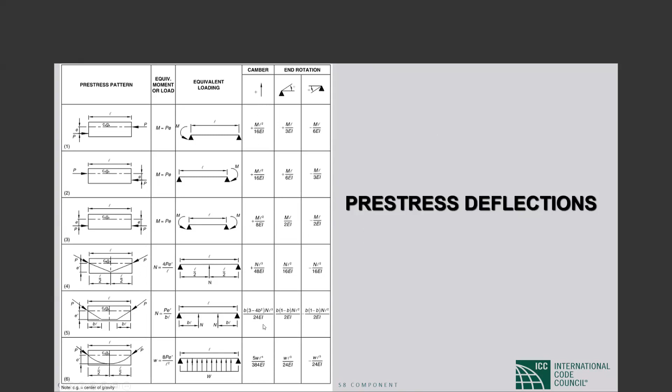This is kind of a trilinear profile. This is like a variable parabolic profile. So they really give us these nice tables. This is a camber table here. If I know the moment, I can figure out easily the camber. Very convenient. There's another table later on.

So I always use these tables in my practice. I give it to the students, and it not only gives you the deflection, the PCI tables give you maximum moments, maximum shears. I've never seen any comprehensive design aid like that. So these are very valuable. You can use them in your design if you want.

So after you figure this out, these are the camber, then you have to superimpose the other values, right? Those would be the dead load deflection, the live load deflection, which are not reflected here, but you can find them in other tables, and you need to find the net deflection.

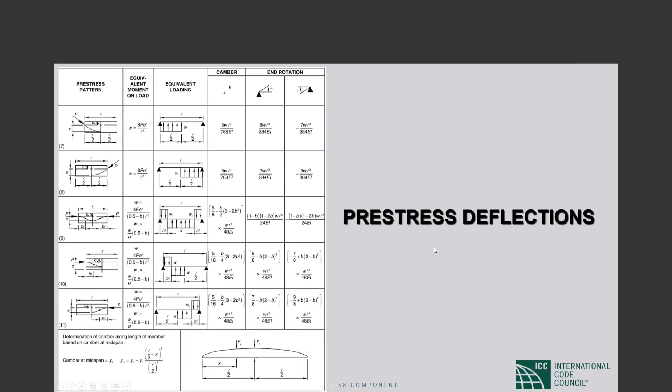I have used them in my examples.

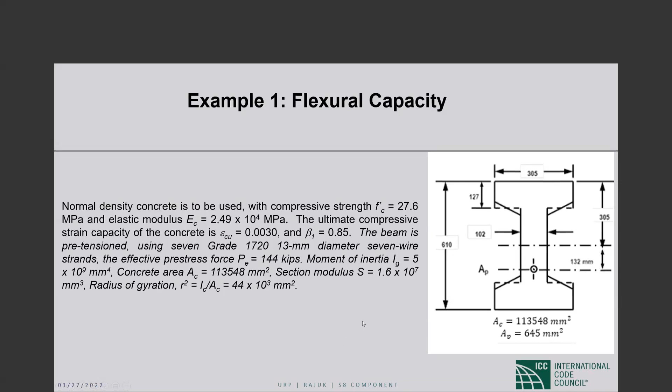So just following back on what I showed you from the ACI code, the first ratio I need to check is this value here. The FPY, yield strength of steel, and the FPU, both are given. ACI says I must be more than that, so I'm fine, 0.86.

Based on that, I can use one of the equations given in the ACI. So steel ratio, well, that's well known now. The rho value is the area of the prestressing steel divided by BD, same as reinforced concrete or prestressed concrete. I solved it and found a rho value of 0.0048, which is the steel ratio.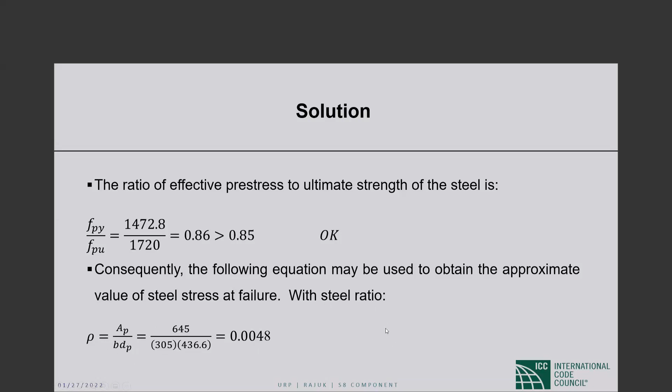Then I went into the ACI equation for FPS, which is the useful stress in the prestressing steel. So all the values are here: Gamma P 0.4 from that equation, rho calculated, FPU is given, beta 1 of 0.85, and then F prime C of 27.6 megapascal plus omega, which is given also in the ACI.

I end up with 1472.8 megapascal, which is the section of ACI that you need to pay attention to, the ACI 08 code. Then I figured out the omega, which is called the prestressed reinforcement index, which is very simple: rho Fy over F prime C. Fy is given, F prime C is given, so we get 0.26. I hope it's clear so far.

Based on that, the beam is classified as tension control. That's very important, because you don't want to have a non-ductile beam. ACI does not allow over-reinforced beams, or compression control beams. This is the check, and it is not the same check done for the reinforced concrete beam, which is a different value. Be careful to use this provision for checking tension control. Tension control means the beam is ductile, which is allowed, and that will give sufficient warning so we can take evasive actions or repair the beam before it's too late.

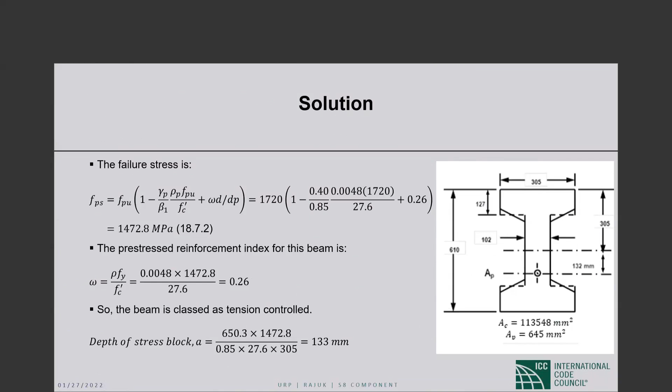So as you know, in the T-beam, we divide this into two sections. We take the overhanging part of the flange, which is this part here, then we take the web part. We take them separately, find Mn1 and Mn2, then superimpose them to get the combined capacity. So that's what I did here.

This is the web part, we call that APW, same FPS, and that's the part due to overhanging. This logic is taught in all undergraduate classes, so I'm sure you're aware of it. That's the force from the overhanging part, and subtracting it out from the overall part—which is AP times FPS—we get the web part, which is 345 kilonewton.

Then we recalculate the stress block in the web, which is based on this one: AP, FP over 0.85 F prime C B. Now we're using BW because we're in the web now. The web width is 102 millimeter.

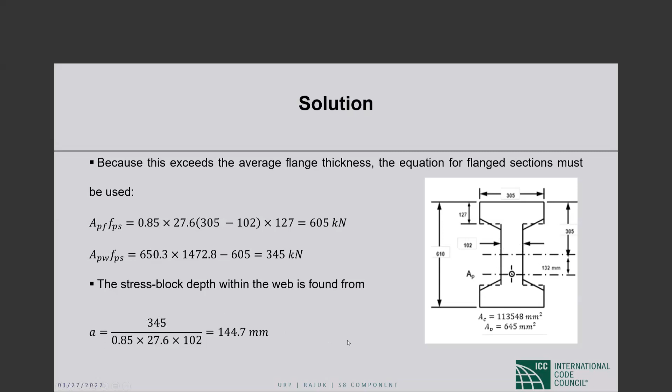Moving along here, that's the moment strength. Now we have Phi-Mn1, but this is not Phi-Mn—Phi is not applied here. This is nominal flexural strength; Phi should be applied here. If it's tension controlled, Phi should be 0.9.

This is the moment from the first part, this is the moment from the second part. Note how I use the 127 here for the flange width and the different value here for the web width. The total capacity is 352 kilonewton meter, so that's the ultimate flexural strength.

What we do is we reduce it by the Phi factor, as you know. Then we can compare that with M sub U, which is the ultimate moment in the span. We can figure out if Phi-Mn is more than Mu, the section is safe; if Phi-Mn is less than Mu, it's unsafe. If Phi-Mn is exactly equal to Mu, you don't want that, because you want there to be a little bit of reserve strength. So try to stay away from when they're exactly equal, because there can be so many uncertainties in load, strength, or other issues inherent in concrete.

I think that's the end of this example.

The second example is shear design, a bit more involved. I have an unequal I-beam, meaning the top flange is different from the bottom flange. Here is the pre-stressing layout, let me move this a little bit.

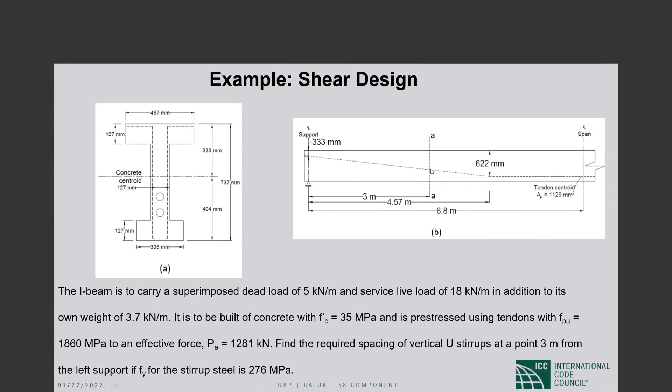I cannot use that value because I'm calculating shear capacity here, so it's a very simple matter of triangle trigonometry, which I did here.

So I found dP at that point, 3 meters from the support. The ACI code says I can assume the depth in shear calculation to be 0.8 of the overall height. Remember the equation I showed you before from the ACI code? That's reflected here, and that value is 589 millimeters.

Then I went into the two equations, the flexure shear crack equation and the web shear crack equation, and calculated them separately. I'll rush through here since I'll take about 5 more minutes.

So I found FPE, the stress at the level of the pre-stress. Make sure to use effective pre-stress because we are designing for the service condition, not the initial condition.

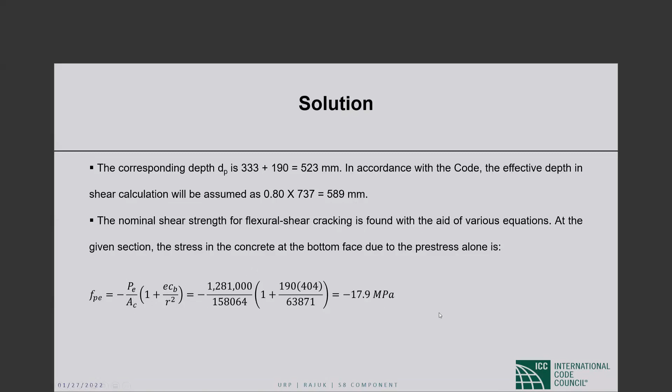Then I figured out the moments and shears. This is old information, you can use whatever method you want, a spreadsheet or code values. These are equations for the moments at that point, so I found the dead load moment and the shear value at that point.

Then I found FD, the stress at the bottom of the beam for the self-weight moment, which is MC over I. Then I found M cracking, shown here with the equations.

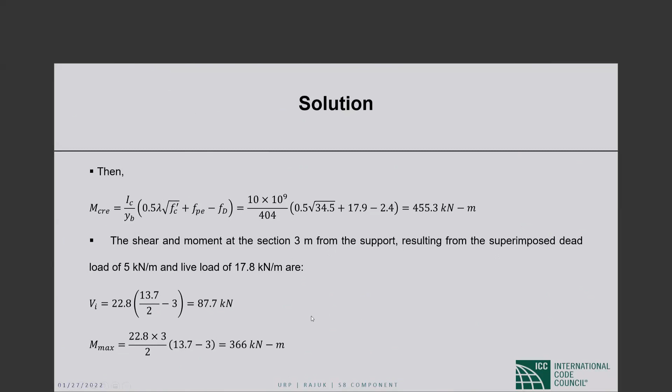Then shear and moment at the section 3 meters from the support, we figured that out from there, applying the live load and the superimposed load.

So I found VCI based on that, the flexure shear capacity of concrete. This is only concrete, no steel is involved. Then I went to the web shear crack equation, which is VCW.

Again using PE, I found the centroidal stress and tried to show the vertical component of the pre-stress. Remember, I told you that would reduce your stress if you want to account for it. Then I found VCW.

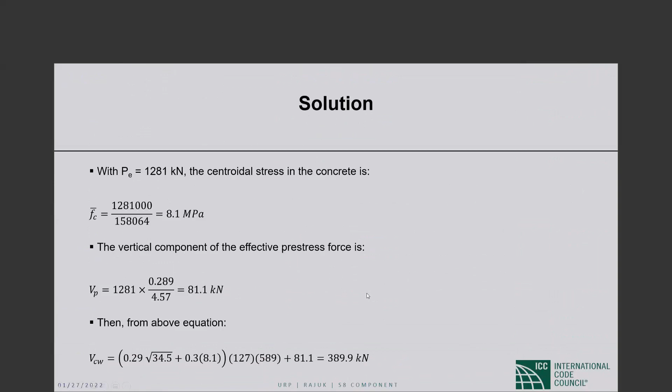Here's something important here. VCW is 389 and VCI is 145. Of course, the lower one controls, so I assume that to be my governing concrete strength, VC.

Then I found out the VU at that point at 3 meters from the support, using a very simple statics equation. Then I figured out VS, which is the criteria that controls the stirrup spacing, by subtracting VC from VU.

I used number 10 stirrups as a first approximation. This is the area of the 2-leg stirrup. Now if I use a double T beam, it may be 4 times, so you have to be careful to sum up the area of the stirrup with the proper number of legs considered.

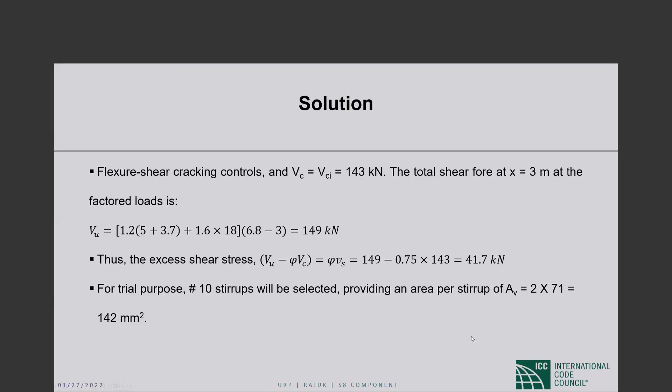Then I use the stirrup spacing equation. I use a phi factor of 0.75, not 0.9, because I'm designing for shear according to ACI, and everything else is given. I found a spacing of 414.7 millimeters from the strength equation.

Then I went down and checked the minimum web steel, as I mentioned before. This is the second equation in terms of S, the unknown spacing. This is where you spend most of the time doing all the detailed checks from ACI, but there's no way around it. Sometimes that takes more time than doing the actual design of the steel.

So based on here, if I solve this based on the minimum one, I get a spacing of 887 based on the minimum web steel criteria.

An additional criteria is that I must use the smaller of 600 millimeters or 0.75 H. Comparing this one with this one and that one, we see that this one controls. So the strength control, this one did not control, so I used a spacing of 414 millimeters.

And number 10 worked out fine. If that doesn't work out, then you have to go back and change the stirrup size to be within the allowable limits.

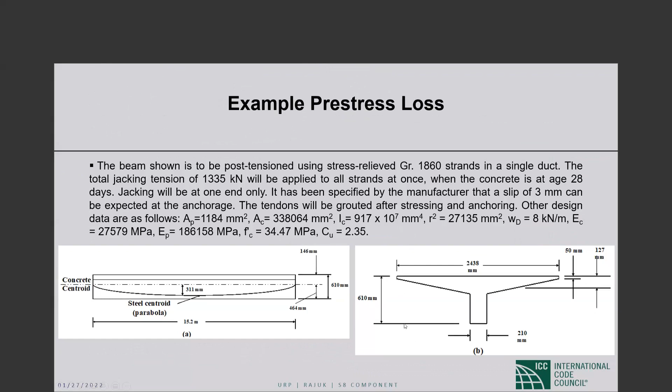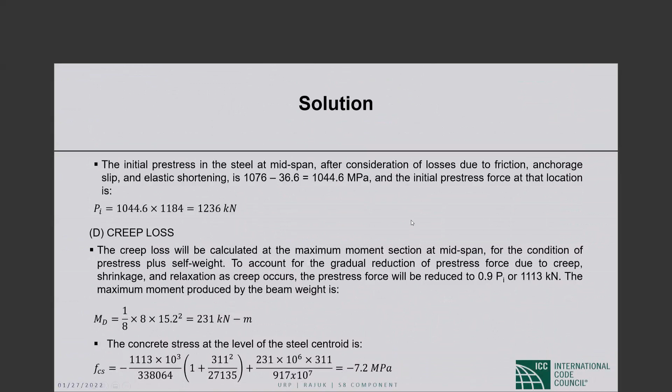So Bodhi, if it's okay, I'd like to stop now because I have another example on pre-stress loss, which I don't have time to go through now. It's kind of detailed. I would request you to look at that example, and spare time if you have any, and then reach out to me if you have any questions.

Sorry, Dr. Yazdani, is it possible to cover this thing in the next webinar or something like that?